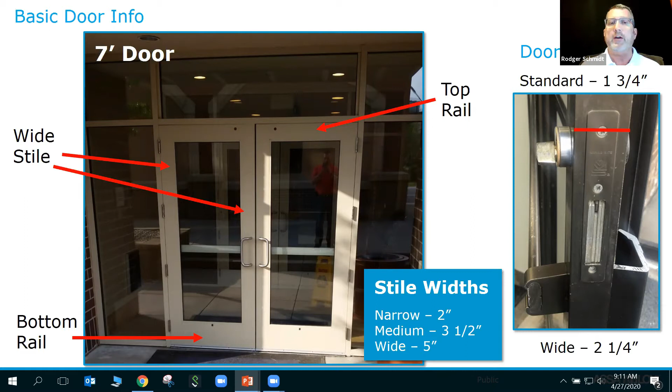Keep in mind, these doors, frames, hardware come in many different shapes and sizes, singles, doubles. They can be super tall. 10 foot is the tallest storefront opening I've ever seen. But usually when we get into that, we're dealing with something that's going to be reinforced with a wide stile to add additional strength to it. After that, we're going to start looking at all the hardware. I need to know what all those parts and pieces are on the inside of the door and on the outside of the door.

This is where whoever's doing the site survey is taking pictures. They're going to be taking images. What do I have to look at in the different doors? What type of handle is on it? What kind of exit device do you have on it? There are lots of parts and pieces that are out there.

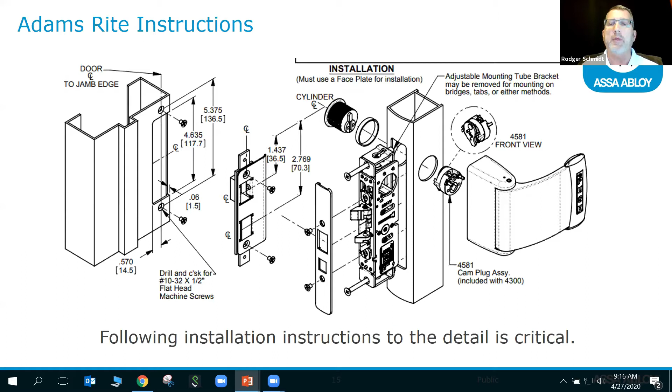Okay, here again, you see a little head popped up there. If you're out there and you're having problems, use your app on your cell phone. Every single technician working on this stuff, make sure they have it on their cell phone, because it is the easiest way to touch us. I'm guessing the background is Ruben Cesar. He's our technical director, manager sitting back there. And he's going to tell you, we've got a lot of people sitting back there that can help and support you.

That's mortise locks there; that key set right there is one of the most common ones you're ever going to come across. And keep in mind, these can come in almost any alignment on the door. Standard on these is going to be 34 to 48 inches above, but sometimes they're lower. And keep in mind, when we're going to work with this door frame, we understand the basics of it, but we also understand codes that apply to what we're going to be doing.

The nice part about looking at these is when I look at these, I see deadbolts that are going to be thrown across an opening, and we have solutions that are there to help you. The Adams Rite 4300 is one of the easiest conversions that we have out there. That is where you can literally pull that bolt out of there, get the proper mounting screws, and we're going to show you mounting in a little bit, and replace it back into that opening as quickly as we can.

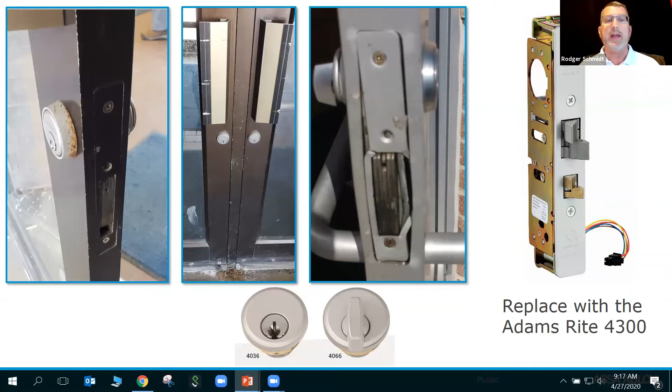Oftentimes you have to consider on the backside, what type of exit device do I have to go with it? That's where that app comes in real handy to be able to support you. But you can see we've got a lot of different options that you're going to find on doors when it comes to how the door is going to be functioning out there in the real world. You have latchbolts that are out there. Probably one of the most common ones is a latchbolt followed by a Pullman latch. Right down there, that's a bar across the door with a Pullman latch. It comes in many different shapes and sizes.

Sometimes it may have a dead latch. The dead latch function gives me that anti-pick capability. As you look at the latch bolts on the left, you can see the main latch and the dead latch right below that. Your standard length there is 3/4 inch. The dead latch functionality is designed to ride up on either the body of the strike, whatever you have there for the strike plate, or the faceplate itself. If you're going to put an electric strike on it, it's going to ride up on the faceplate. But when it collapses into the body, it gives you that anti-pick capability. Same thing with a Pullman latch.

If you move to the right of there, you've got the Starwheel. If you walk into McDonald's across the United States and oftentimes across the world, you're going to come across the Starwheel. The Starwheel has been the standard for McDonald's for many years because it has additional strength in holding. It cannot be pried open the way the latching can, where the Starwheel interacts with the latch, but it also keeps the little kids from getting their fingers hurt. So that's really critical to us. On the right, you've got hook bolts and deadbolts. There's not a lot we can do with those, so we'll come back to those a little bit later on.

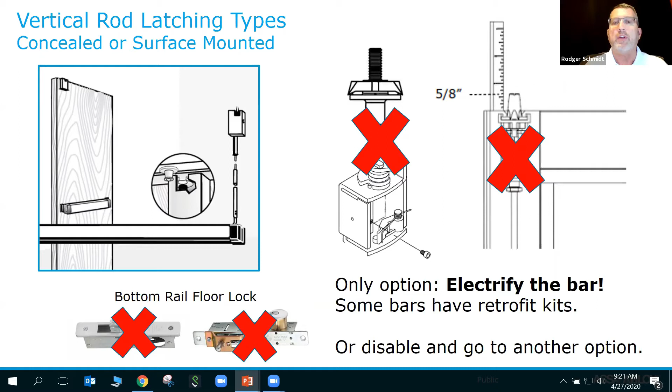What are good options out there if we're going to access control? And we have to understand what we're looking at. So this is where it comes back to part of your responsibility when you're out there as well. When you're doing the site survey, there are things you have to know and understand, and probably one of the most important things is a lot of times you'll come across an old retail that's been a standard lock and key, get in the store every morning, and now 30 years later. So this thing's been in place for 30, 40 years already. That's how old some of those latch bolts you're going to find are going to be out there.

But when we go in and we start converting something from a mechanical format to an electrified format, you have to know and understand the codes. I may have that old latch bolt that's been there forever and it's code compliant until you modify it. You go in there and modify it, you are responsible for code compliance with it.

Maybe back in the 70s was originally installed that good old lock bolt, the lock set, and I used it, that's how I opened up my door for 30, 40 years. Somebody else comes in and says, I don't want to give out keys anymore. I want to go to electrified. Well, I've got more than 50 people that are going to exit out of this door. Now I'm required to put a panic rated bar across that door, which means it could change hardware that I'm going to work with. So we have to know and understand the codes.

You have to know and understand what codes are applicable in the area you live in. Is it 2012, 2015, 2018? There are some sections that still fall under NFPA, so you need to know and understand what code you're legally responsible for following. But if you ever convert something from mechanical to an electrified version, you have to bring it to your current code responsible for that. So make sure you understand it.

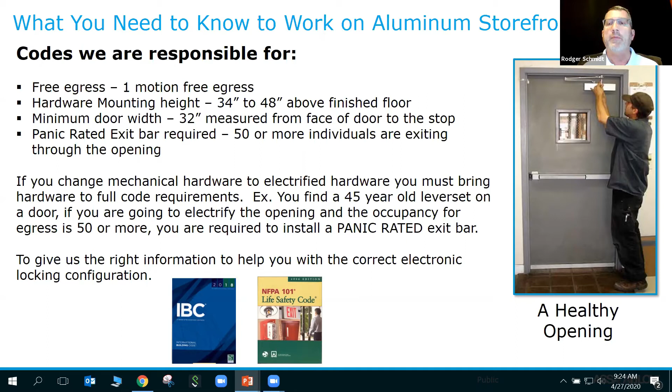You can show us a lot of stuff. Yes, if you show me in a video stream a door operating, I can help you, or my technicians can help you on the back side and say, yeah, it's healthy, it's not healthy. But you're gonna have to make that decision out there. Is it something you can work on or something you cannot work on?

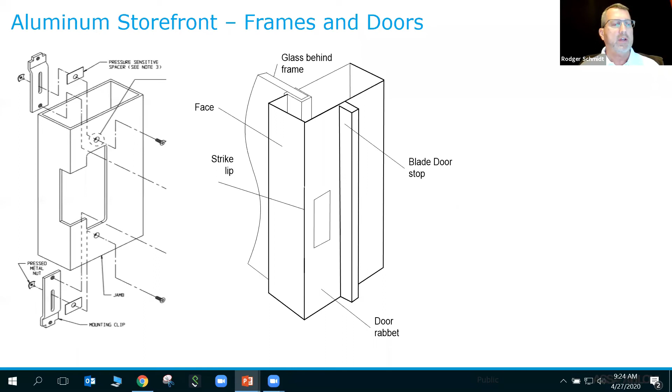But when you go over to the next one over, this is where we get into that true storefront opening. And what we're dealing with there is that piece of corner sitting back there behind it that holds the store glass in place.

Because that little corner right there, if you're up there working to do installation and add something out into the frame itself, you have to be careful. Because if you just nick it, you are going to have a problem. And we'll show you that in a little bit.

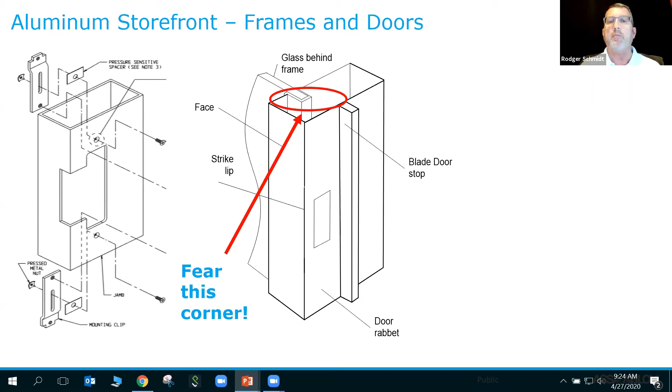If you're familiar with strikes, well, the strikes were designed for these pockets, for this original design. The Adams Rite 7400 is designed with a shallow depth to be able to decide: if I'm going to get in, I'm going to install it. What am I going to work with?

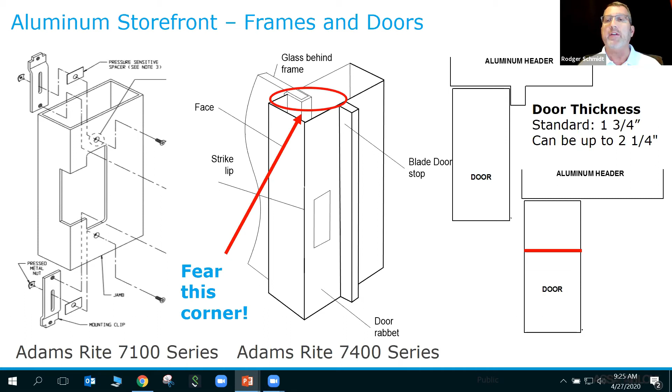Earlier, I talked to you about the door thickness. You need to pay attention to the detail of the door because this will make a difference in the hardware you're going to select, the hardware we're going to be able to help you pick. Is that door thickness 1 3/4 or 2 1/4? So we're paying attention to the detail.

Here, just a quick review. You can see all the different strikes that we have. They'll fit the different styles of frames that you have. That box that's open in the back: my depth, 1 and 5/8 inch.

But when I get over here to the other side where I've got to deal with that glass, the depth of my strike is only 1 1/16 inch. So I've got a little space back there, but I want to be careful. When I'm out there working, I am not going to hit that back corner back there.

As we look at the basics of the frame, now we're going to turn to the stile. And this is a narrow stile frame here. Because right now, if there's one thing you really need to know if you're going to pick the hardware for a storefront opening, this is critical. I'm going to talk about the backset. If you mess up the backset, it will be ugly for a long time or until you pick that stile out there.

Here's a basic stile and the basic dimensions. It's standard; we don't have too many problems out there. What I need to pay attention to is the hole right there in the center where that cylinder goes. You can see here on the back, this is a straight-in look through the pocket at the mounting holes. These are standard mounting holes. All the parts and pieces that fit in the pocket have mounting holes that will line up with it, which makes it nice and clean.

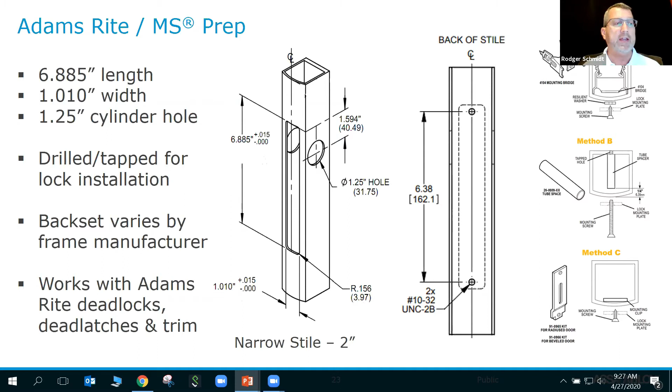We also have different mounting options. So if you get in there and it's been damaged, you may have to go in there and fix it. You have different options for selecting and mounting. And these are things that take some time, and this is where you have to pay attention to details when you get into mounting something and it becomes messed up. So now let's look at the backset, because the backset is critical.

Backset is one of the most important things when we're out there working on the job site doing a site survey to replace something mechanical with something electrified. Over on the left, you can see the different faces. They come in flat, radius, bevel left, right, rounded, weather stripping. You can see how they look from the top side, looking down across it.

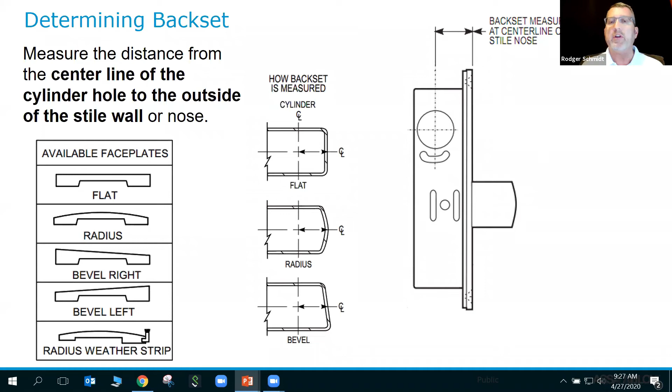But on the right-hand side, this is where we're dealing with the opening, because when we're out there doing a site survey, we're not going to pull out the hardware that's existing in the opening and measure it. We're going to have to measure there during the site survey to make sure we're getting the information we need. From the center face of that plate to the center of the cylinder, what is the backset?

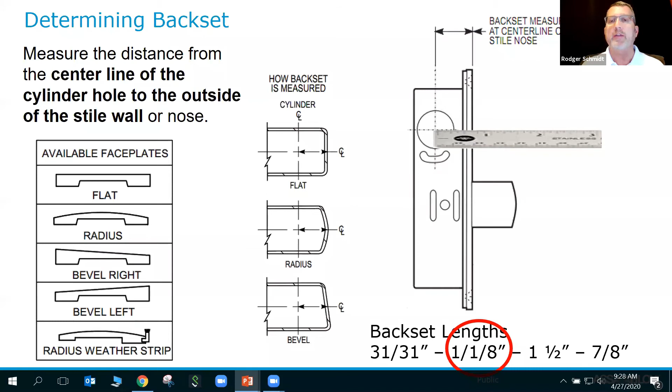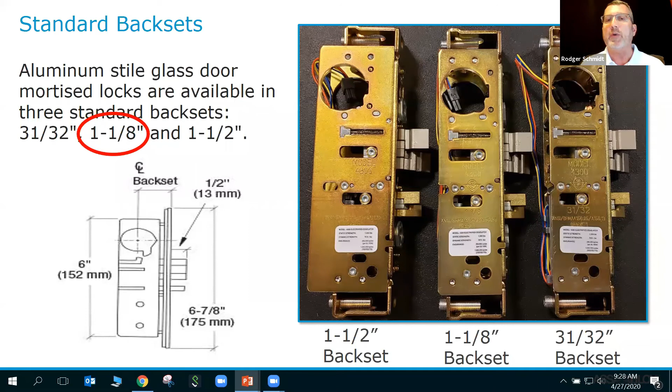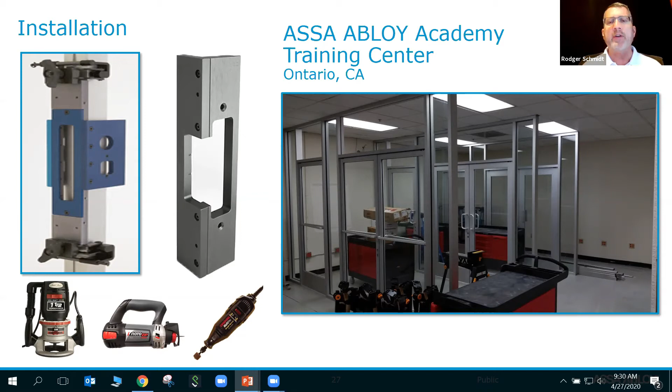Give them an opportunity to practice. Go to an old reclamation yard that may have construction materials, buy a stile and let them practice before you go out and mess it up on a site. In Ontario, California, we actually have a training center where we train with aluminum stile openings. So we get a lot of respect out there. Guy Robinson from our team runs some great classes. They're phenomenal to help and support you, okay?

Just some quick tips I want to talk about as we go through this. We've got a lot of options when it comes to working in that stile. On the far left, you start out with a double door. The one leaf we're not going to use, so what they did is they installed an electric strike in the frame. So with this, I've got an electric strike in the non-active leaf. I really like what they did, because the most important thing to notice is when you're installing something like this and you're going to use a tab kit, you always have to use 2 screws in it.

If you go over to the third one, you can see the result of what happened when someone did not install a second screw in the tab kit. The door was unhealthy. You can see where it comes in and rides up on the bottom side of it, which creates a lot of different problems. You want to pay attention to the detail and make sure you install it cleanly. On the right-hand side is where they did the fix.

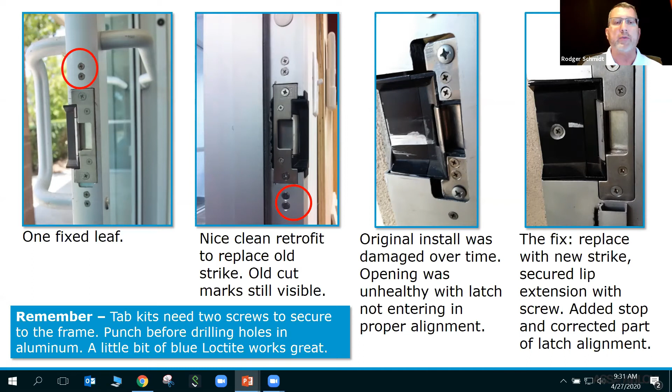But take a look at my notes down here. You want to punch this soft aluminum. You need to punch it before you drill it. Okay, and make sure you use 2 screws. A little Loctite in the back of that screw works great, and do use blue Loctite, not the red stuff.

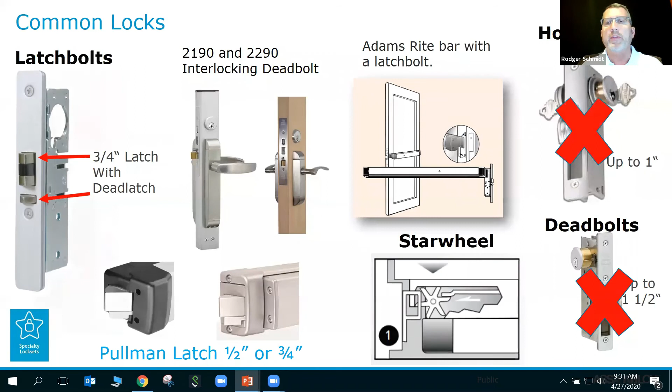Okay. We're going to talk about some scenarios here. We're going to look at taking some of this hardware and what our options are as we look at the different openings out there. Remember, we're not going to do much with our deadbolts. So here I've got a deadbolt on here.

I messed up the screen there.

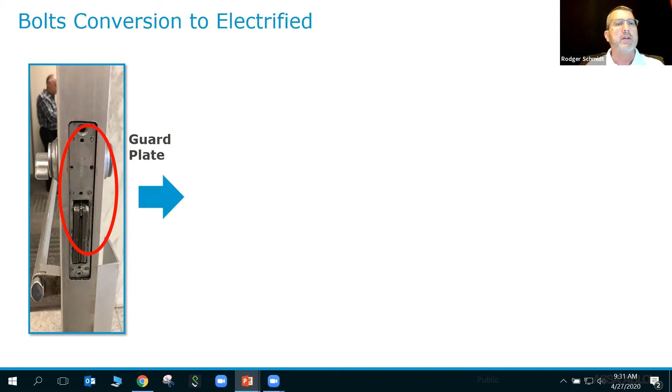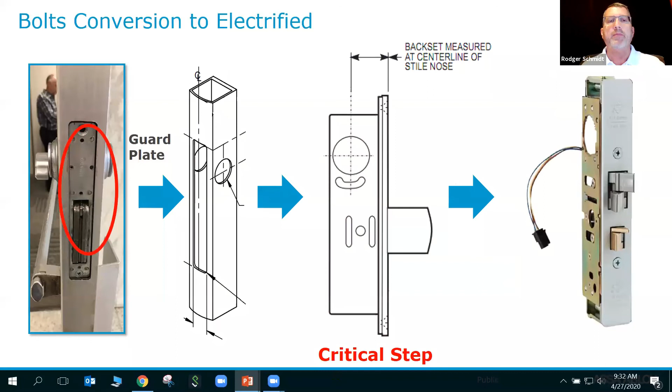So, okay, here I've got a deadbolt up there. We're going to look at the stile, what kind of stile we're working with. We're going to measure my backset on it. And then we're going to look at what products we have that we can work with it. So backset is critical. Here I can pull out the deadbolt, I can work through my steps, understanding my stile, understanding my backset, and that gets me to where I'll lock my 4300.

Okay, here I've got a latch on it, but here I've got my guard, so I do apologize for my animation. Here I've got my latch with my dead latch. I've got a guard protecting it on the outside. I'm working with my stile. I'm measuring my back set again.

Okay, so here I'm measuring my back set, and here I have a different option. So here I'm going to go with the 2190. They're not always going to be the same. A lot kind of depends on what functionality the customer wants. It's not 2190, it's a 4300 and a different setup, I'm sorry.

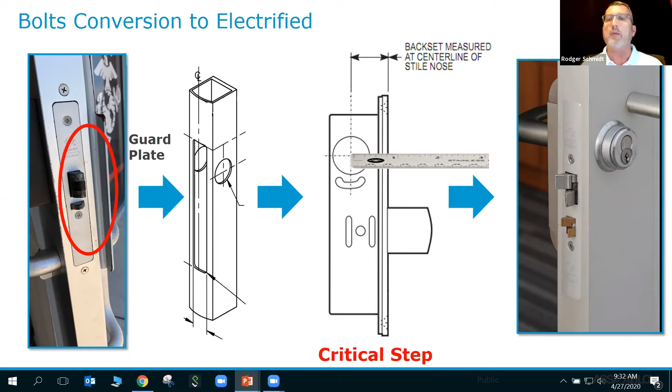If we look at the different options out there, there are a lot of solutions, but keep in mind, we also have to pay attention not only to the lock, but also exiting hardware and entering trim. Here I've got a Pullman latch, the good old Pullman latch. Remember, it comes in a 1/2 or 3/4 inch.

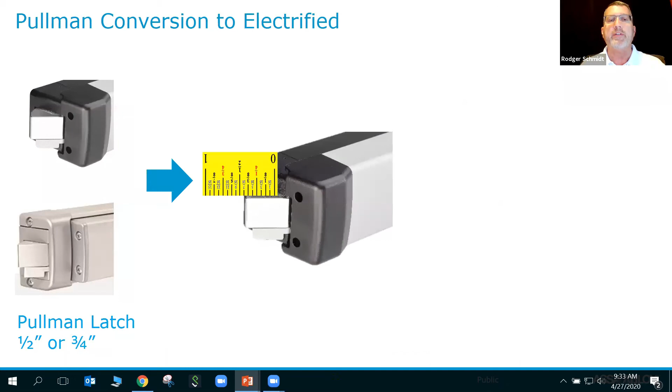This is where someone's going to have a ruler. I want to be able to measure the length of that latch because it gives me options. Is it a 1/2 inch? I've got the HES 9400. If it's a 3/4 inch, that'll take me to the HES 9600, non-fire rated. Very few perimeter doors, if any, on a storefront opening are ever going to be fire rated. So we don't need a fire rated product. But I have other options as well.

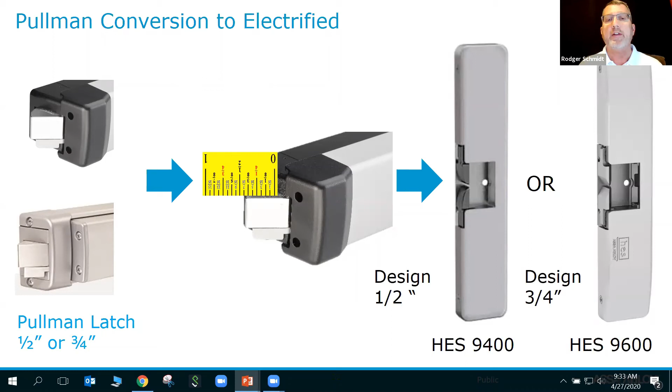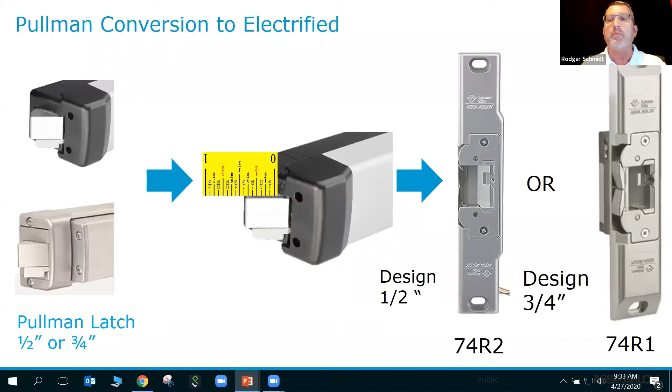If I want to go to the Pullman latch, I can also go to the Adams Rite side, 74R2, designed for a 1/2 inch, or I have the 74R1 designed for a 3/4 inch. And I really like the 7400 product because it allows for 25 pounds of preload pressure against it. And if you're not familiar with preload, it's when you push pressure against the latch that it binds up the striking mechanism, so you've got pressure blowing against the door, air conditioning, weather stripping.

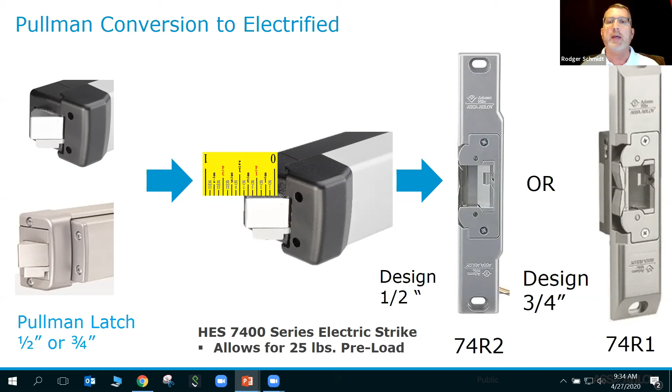The latch goes against the strike. The legs of the strike put pressure on it. They will not release. This 7400 is designed to handle up to 25 pounds of preload pressure. It has been one of my favorite products for many years in the field, because if you're anybody in Phoenix, Arizona, used to dealing with the sun and the heat in the summertime, our doors heat up, we get swelling, and you get preload pressure. Those are details we pay attention to.

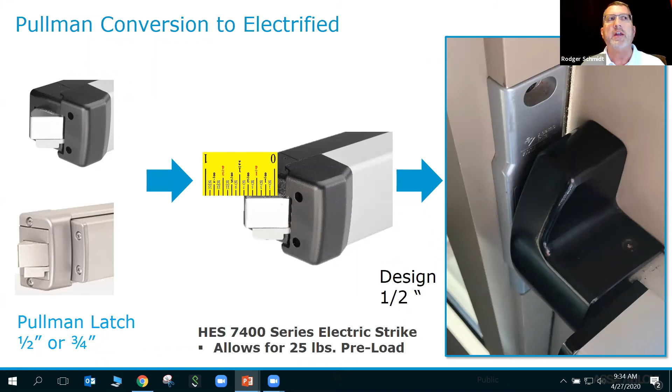Here I've got an option where you can see it's installed. I've got the 74R2 installed with a Pullman latch. So we have lots of options out there. If we do workmanship neat and clean, you can see it's very professional. I want that call back, so someone's always going to call me back.

If you've ever been to McDonald's before, you've seen that Starwheel. The Starwheel has been standard out there for many years. The past 1.5 years, we offered it in the EX88, which is a heavier duty version of it, new style. You're talking about something simple and quiet. It's nice, aesthetically appealing, but it's also a Starwheel. And we're working with that Starwheel. We've got options out there too.

There are millions of the mechanical Starwheels out there because we see them at McDonald's, at all kinds of restaurants, in professional office buildings, that exterior door. It gives you a very strong center latching mechanism for an opening. It also gives you the capability now, with the new 9800 HES strike and the 7800 by Adams Rite, of electrifying that mechanical bar. So with the 7800 and the 9800 by HES, I can now take that bar and easily electrify it.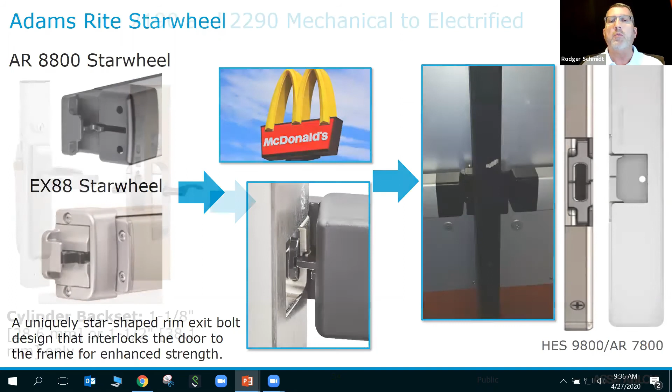There's not a retrofit available for the 8800 Starwheel. You either order the 8800 EL, 8800 electrified, or you can add the electric strike to it now. So we're giving you more and more options out there. When it comes to the 2190 and the 2290, there again, we're going to walk through the same basic steps that we did before, understanding our back sets.

It gives you the capability of unlocking it during the daytime. You can hold it back during the daytime. But if you've got to throw that bolt and I need to exit, with the turn of that lever, I've got an interlocking retraction of the deadbolt, 100% code compliant.

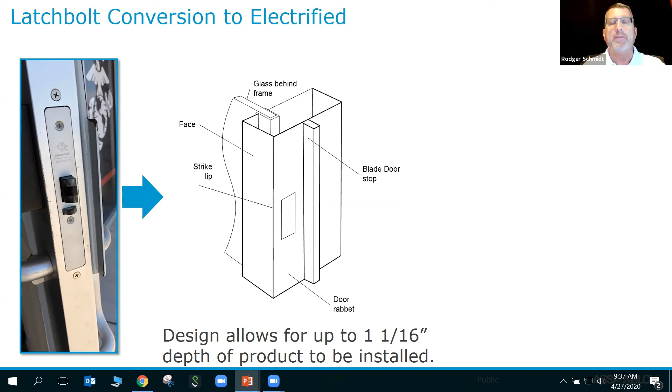Here, I've got my latch again. Here, I'm going to look at my frame. So here I've got a frame. I don't want to change out my hardware on my door. What are my other options? So here I'm looking at the frame. I've got glass on the back side of it. What are my different options?

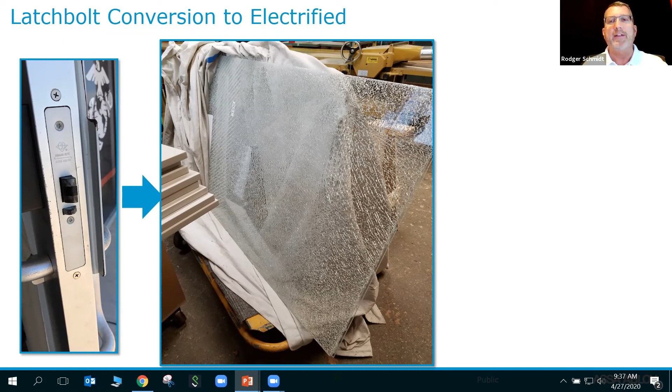And I fear that corner because, I want to get a quick chance to see anybody that's ever done this before. Has anybody ever popped the glass out before? And it happens, over and over and over again. And everybody said it would never happen to me. You're just waiting for that day because you're going to accidentally tick that corner and all of a sudden it's going to catch you. It's going to pop.

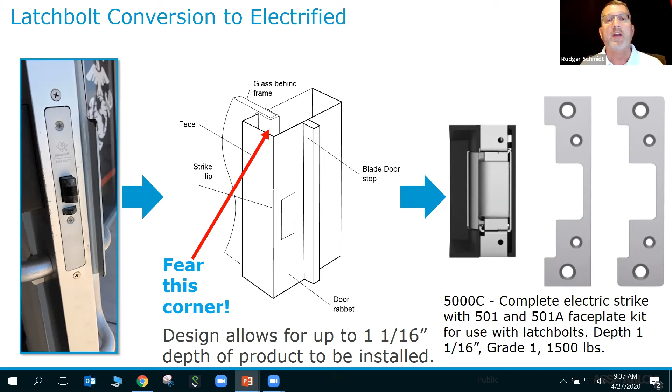I've got options. I can put the HES 5000. It is only 1 1/16 in depth, and 1 1/16 is your maximum depth you're going to put into that pocket. With the 501A faceplate, this is designed to go in there nice and clean. You may have to use a tab kit, so you've got an option. So the 5000C gives you an option. Also the Adams Rite 7400 gives you an option with different plates, as I showed you before. So you've got options, but you've got to pay attention to the detail.

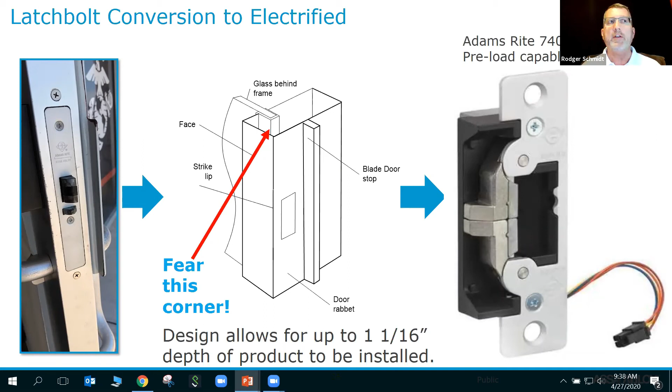When you're doing the site survey, what do I need to know to pick the right parts and the right pieces? So how about here? Someone's invited me to come out and do a site survey. I'm going to access control this door. I'm going to put a card reader, some type of reader. I've got an option, standalone. They only want standalone, they want to keep it simple. So I'm going to go with the standalone. It gives me that keypad capability.

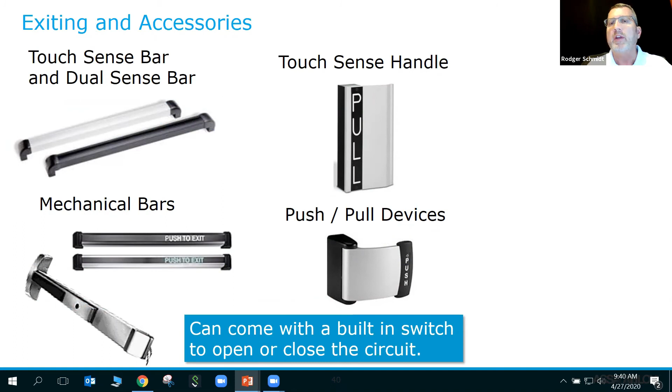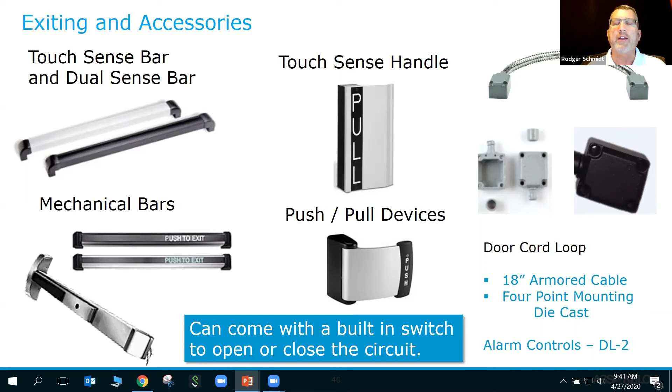But also keep in mind, oftentimes you may need the accessory of some type of a door cord loop out there. The door cord loop, you want to put it up high and you want to use something heavy duty. I don't know how many times we get called back out there. You've got that plastic cover on the end of your loop. It gets broken, it gets damaged, someone hangs on it. You put these at the top of your door. You use the metal caps. You've got 4 mounting screws on there. It is not going to be coming off unless someone intentionally damages it.

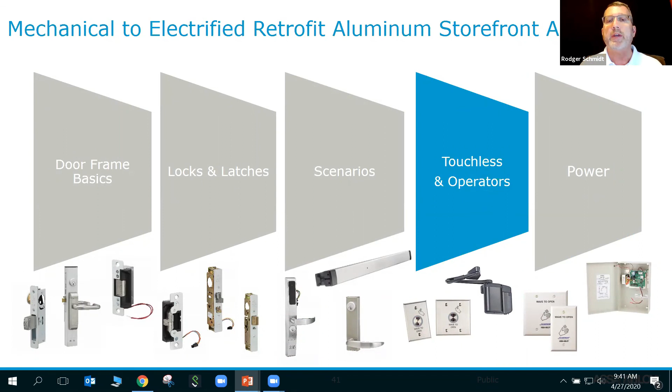Okay, we're watching our time here, so I'm going to briefly move over to the touchless options. Because, as we all know, we're changing very quickly right now. We're trying to figure out how we are going to move forward and get all of our businesses back open again. And as we all know, everybody is afraid of touching everything. We've got many states out there getting ready to open back up, and there is a huge fear of how this thing is going to continue to grow. So we want to really pay attention and make sure we can help take care of the customers that are out there.

With that, we're going to talk about some of those touchless things, because nobody wants to touch anything out there. I spent a lot of time in hospitals where the Wave has been out there for many years. So we've got the Wave sense out there. I can wave and I can open up the door. We've now got the no touch switch also from alarm controls. These are devices where I can literally wave at it and the door will automatically open up.

So one of the things that ASSA ABLOY and ADI have done, we started working on different programs where we can provide kits for you, where we can work with that guy out there to help them. Okay, I can install a door operator. These are things we should be able to do very simply and very easily. So there are door operators that we can talk about, and how to open them up, because people don't want to touch anything.

I was in a building up in Vaughan, Canada last year, and every one of their doors had a small operator on it and had a wave switch on it. I could literally walk by and wave at it, from a distance of 4 to 24 inches. But also the no touch switch.

I like that, and I was working with a hospital one time where about 5 or 6 of their wave switches had the plastic broken off, and they said, okay, let's go to this one here. Obviously, they're not just waving, they're punching and hitting it still when they're not paying attention. But the NTS one comes with a stainless steel cover plate. We reduce a little bit of that read distance, but we have options.

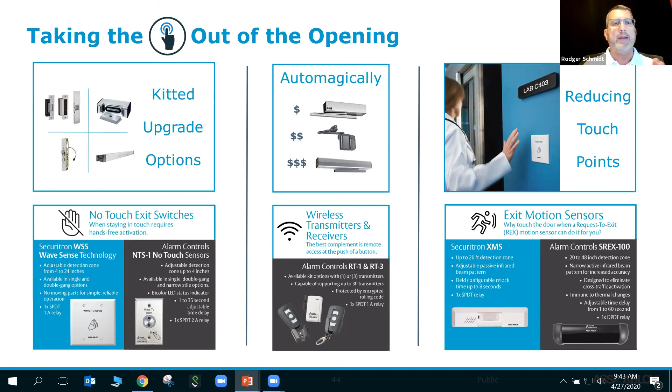So between ASSA ABLOY and ADI, we're coming out with kits and programs to be able to share these with you. And you can see some common applications where we're opening up doors and trying to let people out. We can do a lot of this stuff with Wi-Fi or wireless capability now. It's just figuring out the right parts and pieces that work for you, and working with your representatives and the ASSA ABLOY support app.

How can we help you?

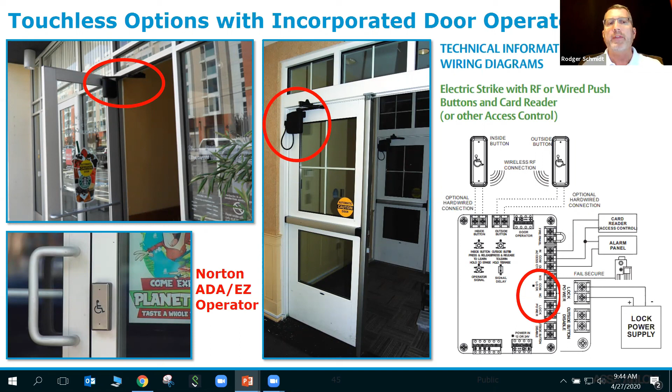And the other thing that's really kind of neat about a lot of these operators out there, not on the ADAEZ, but on a lot of the other operators that are bigger, they actually have onboard power capability. The one you see up on the 2 doors here does not have onboard power, but many of the other operators out there do. And like I said, we're working between ASSA ABLOY on the Norton side operators and ADI to create packages that are out there.

These are things that we should be able to do. We can add them to our solutions we can offer to the customer. I'm kind of the guy that I don't want to pass it up. I want to figure out, can I do it? Can I work with these things? Can I teach my technicians?

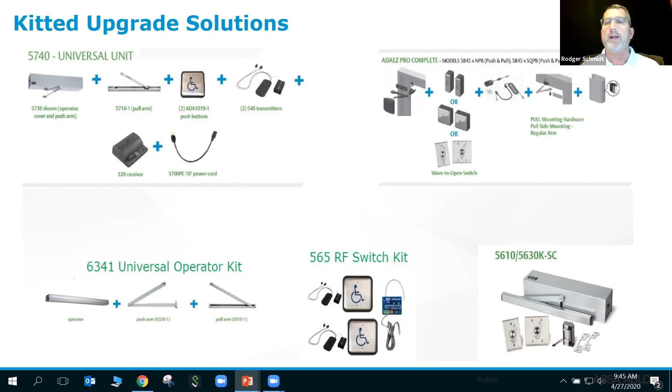If you can install a mag lock on top of a door, a lot of these operators you can do too, but you also want to pay attention to the details of the instructions, because there are solutions that are being created. Solutions with ADI and ASSA ABLOY, the Norton side of the operators, all the different solutions, whether you're going to do the Wi-Fi, you're going to do the wireless options, buttons that we can push. There's lots of options that are out there for you. So look those up and let our team support you.

Here we can see some of the different solutions that we're looking at, different types of operators. And whether you're going to use a wave sense, a touch sense, what kind of hardware you're going to use out there. Now, I mentioned earlier, there's power on board some of these. The power on board some of these operators is low amperage, not designed to do a latch retraction. If you've got a strike, you've got a lever set, you've got a mortise lock set, a lot of these we can handle out there.

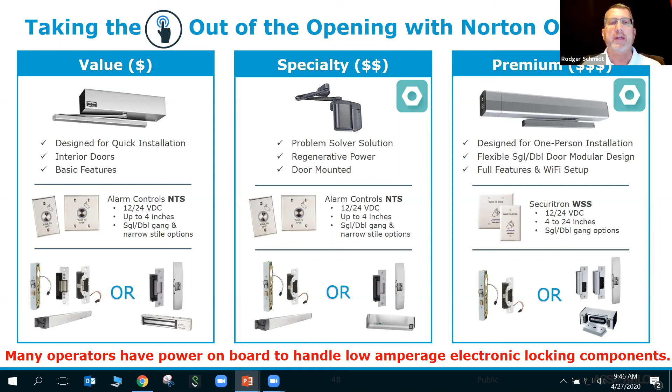As I said, the one in the center, the ADAEZ, does not have onboard power for you. But also notice on the one in the center and the one to the right, the premium up there, you see the BILT app sitting up there. The BILT app means there is a step-by-step detail, literally in 10, 15 second snippets of how to do it, one step at a time. The only thing we can do to make it easier for you to install this is for us to go out there and do it for you. The BILT app is designed to help you install something quickly and easily. We're giving you solutions out there. We're partnering on packages that will make it easier for you out there.

There are a lot of different options that are out there. Take a look at our different brochures where we start combining different things, where we're looking at the different touchless options, because we are going that way right now. This is all about a switch. It's using a switch to throw another switch or to throw a relay. There are tons of them out there. The Securitron ones have that lifetime, no questions asked warranty. There's a lot of support that'll help you out there, and we back it up with our warranty on these.

Briefly, just to talk about power, we've got a lot of power solutions that are out there as well. If you're familiar with the Life Safety Power supplies out there, they are now part of our team in Phoenix as well. That Life Safety side, we're giving it the no questions asked warranty, the same as we've had with our AQDs and the BPSs for a long time. So a lot of solutions and options out there for you as well.

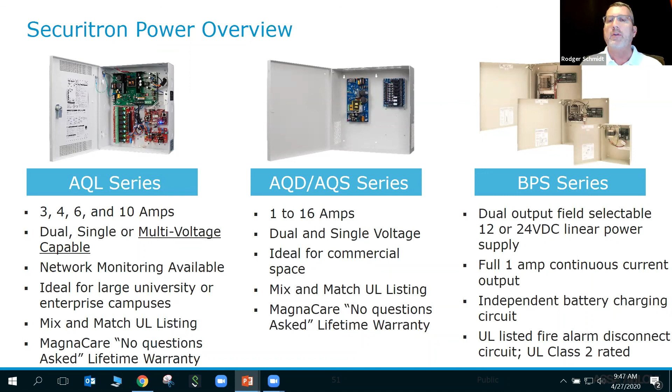Okay. We've got a lot of support. If you're working on the Adams Rite stuff out there, use your solutions. Use the things that we give you to make it easier for you. The Adams Rite website has tech support capability right off the website. There are a lot of solutions and a lot of people to help you out. You also have ASSA ABLOY Academy out there, over 70 classes online for free. All you have to do is register, set up and take them.

Okay. Here I've got just the last two apps. I've got the BILT app and ASSA ABLOY Customer Support app. Go ahead and use them. Download them for free. They're there for you.